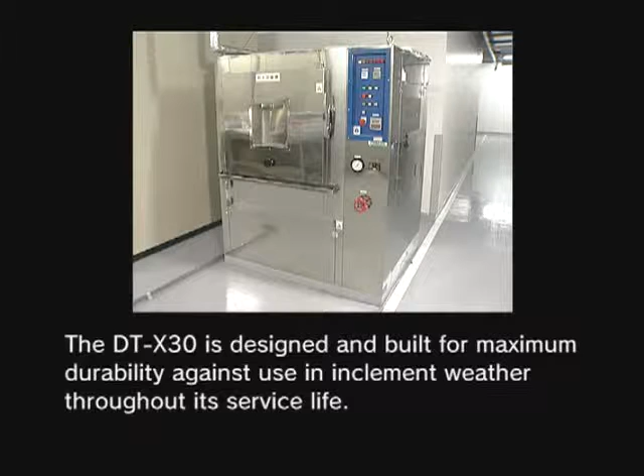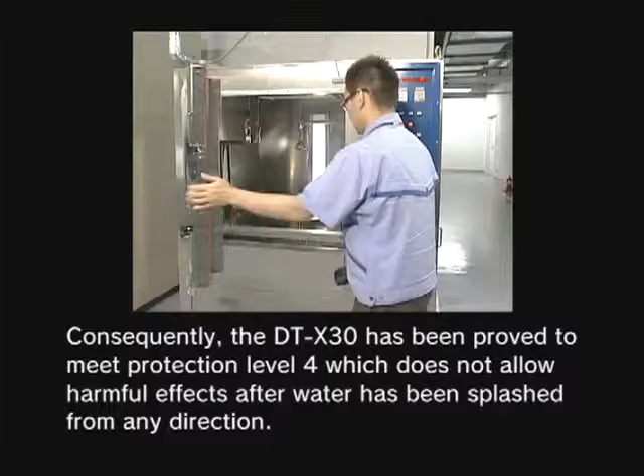The DT-X30 is designed and built for maximum durability against use in inclement weather throughout its service life. The entire assessment test is carried out following the definition and test procedure according to the international standard IEC 60529, prepared by the International Electrotechnical Commission for worldwide unification. Consequently, the DT-X30 has been proved to meet protection level 4, which does not allow harmful effects after water has been splashed from any direction.

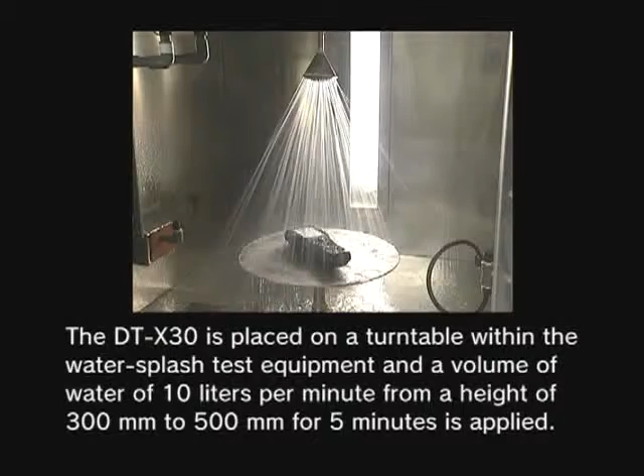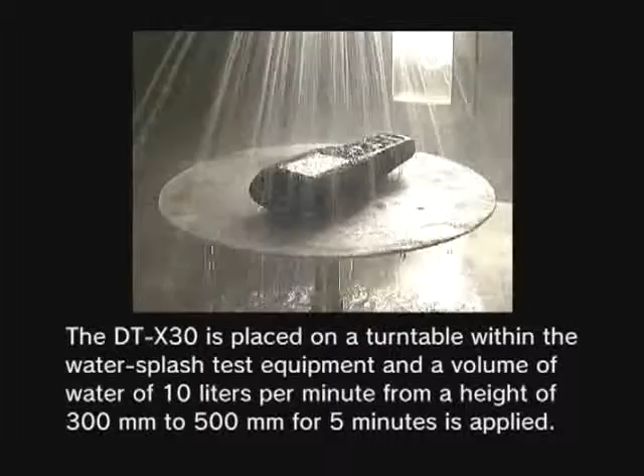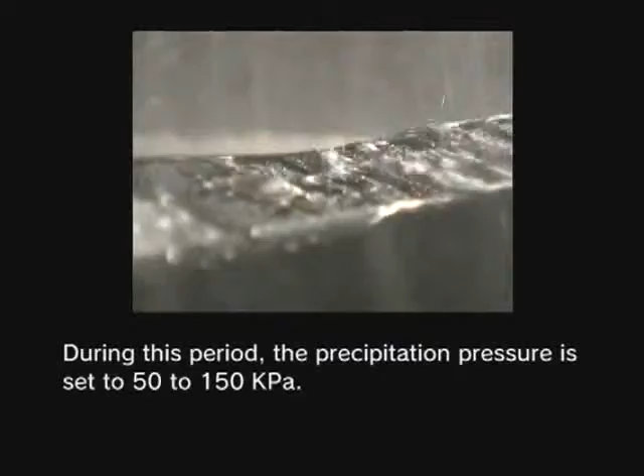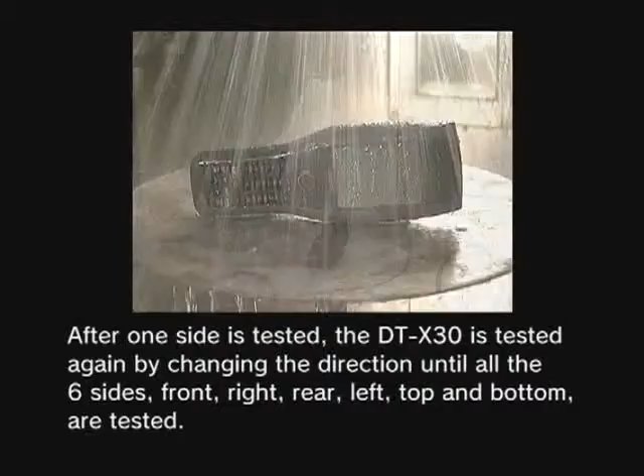The DT-X30 is placed on a turntable within the water splash test equipment, and a volume of water of 10 liters per minute, from a height of 300 to 500 millimeters, is applied for 5 minutes. During this period, the precipitation pressure is set to 50 to 150 kilopascals. After one side is tested, the DT-X30 is tested again by changing the direction until all 6 sides—front, right, rear, left, top, and bottom—are tested.

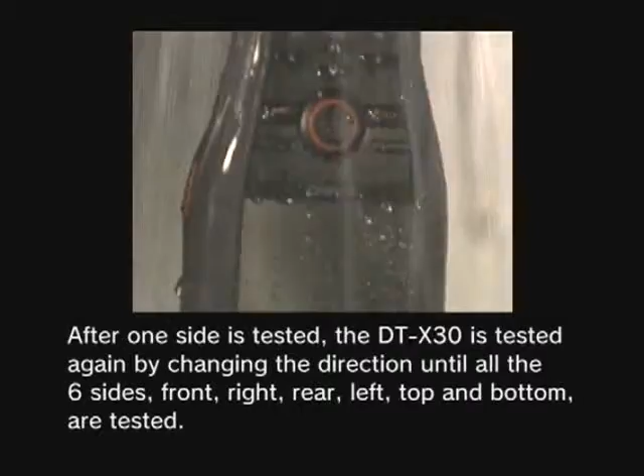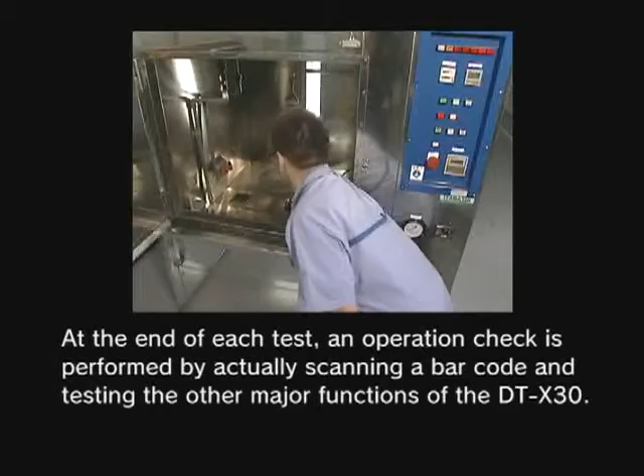At the end of each test, an operation check is performed by actually scanning a barcode and testing the other major functions of the DT-X30.

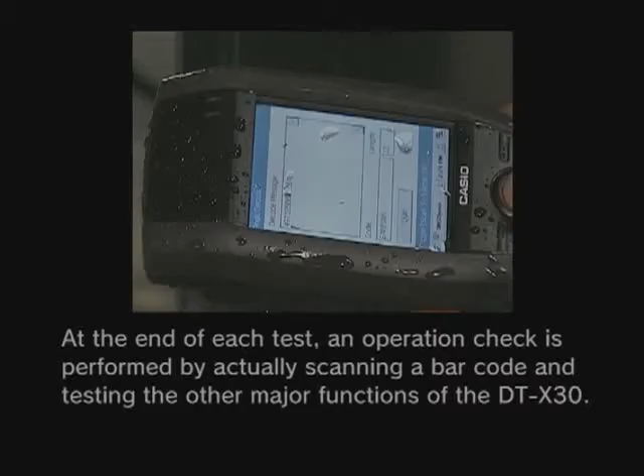The IEC 60529 standard also applies to the classification of degrees of protection against penetration of solid foreign objects, including dust. The classification ranges from 0, non-protected, to 6, dust-tight, the highest possible rating.

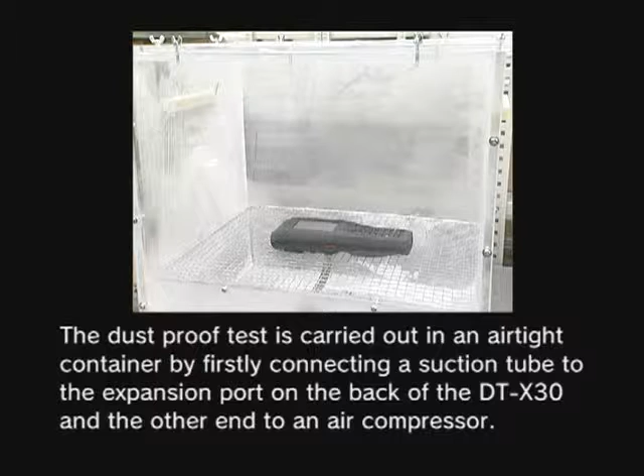The dust-proof test is carried out in an airtight container by first connecting a suction tube to the expansion port on the back of the DT-X30, with the other end connected to an air compressor. After the preparation is complete, the DT-X30 is left in the container and the container is tightly closed.

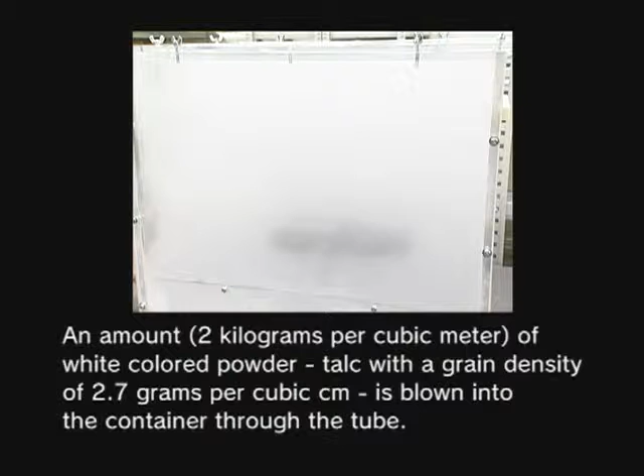An amount, 2 kilograms per cubic meter, of white-colored powder, talc with a grain density of 2.7 grams per cubic centimeter, is blown into the container through the tube. It takes nearly 1 hour for the powder blown into the container to settle on the bottom and over the DT-X30.

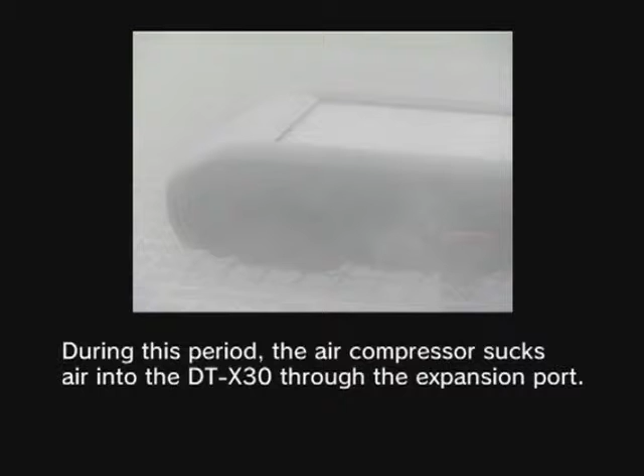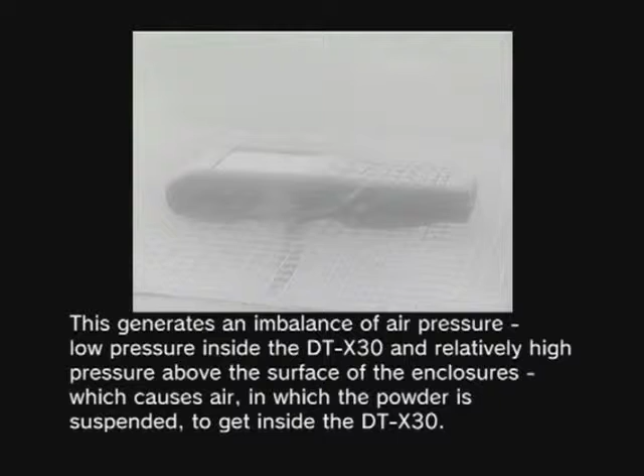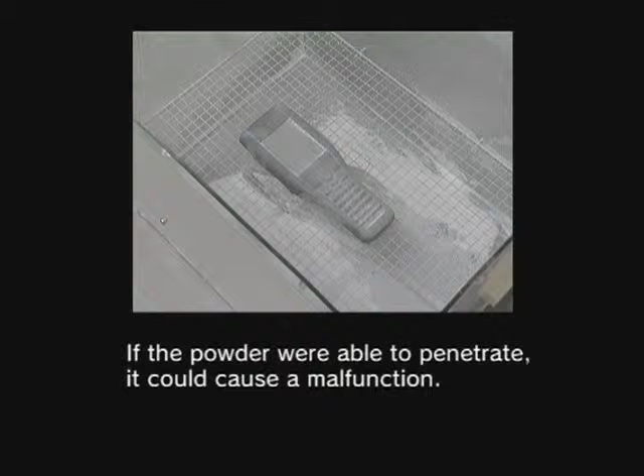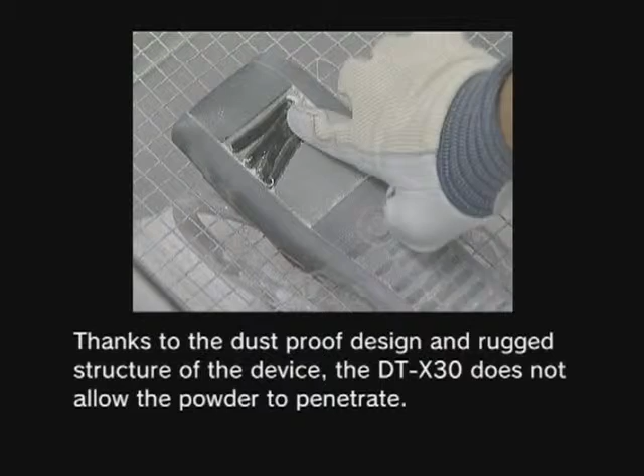During this period, the air compressor sucks air into the DT-X30 through the expansion port. This generates an imbalance of air pressure—low pressure inside the DT-X30 and relatively high pressure above the surface of the enclosure—which causes air, in which the powder is suspended, to get inside the DT-X30. If the powder were able to penetrate, it could cause a malfunction. Thanks to the dust-proof design and rugged structure of the device, the DT-X30 does not allow the powder to penetrate. This proves that the DT-X30 meets the highest level of protection for dust, which is 6.

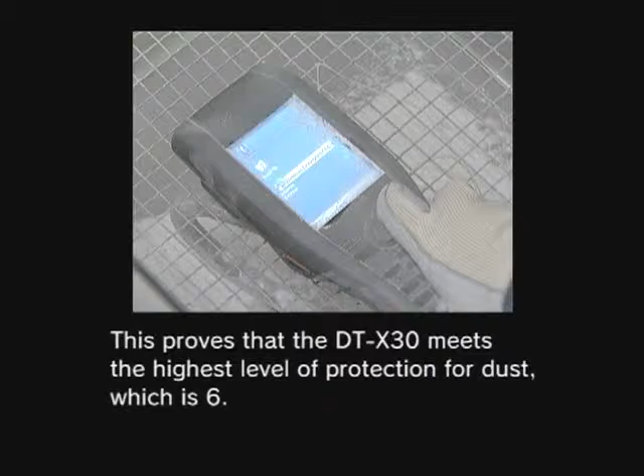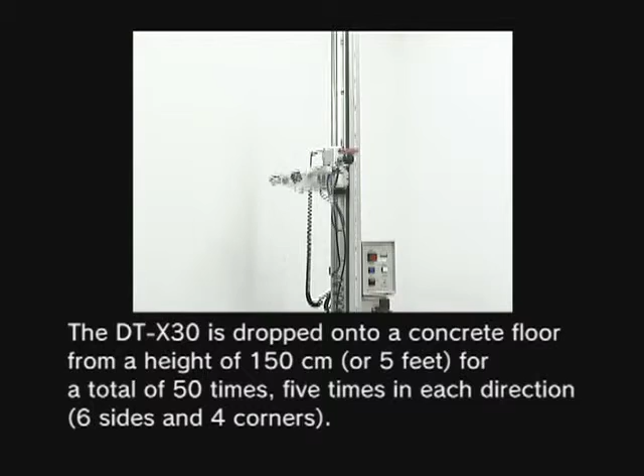To ensure the drop and impact durability of the DT-X30 against harsh handling in its service life, the DT-X30 is dropped onto a concrete floor from a height of 150 centimeters, or 5 feet, for a total of 50 times—5 times in each direction, covering 6 sides and 4 corners.

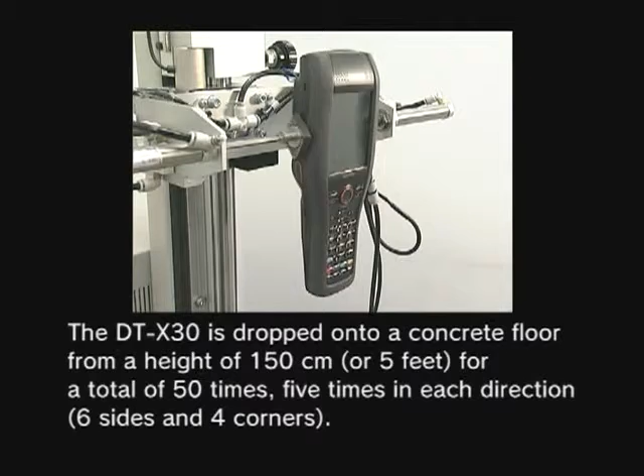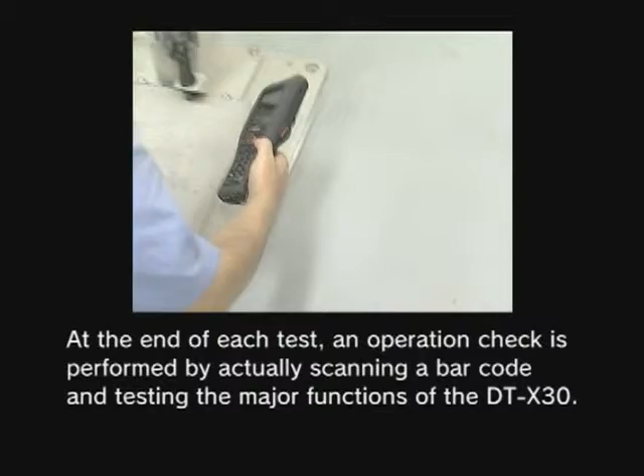At the end of each test, an operation check is performed by actually scanning a barcode and testing the major functions of the DT-X30. After 50 drops to concrete, the DT-X30 is considered to have passed the drop durability test.

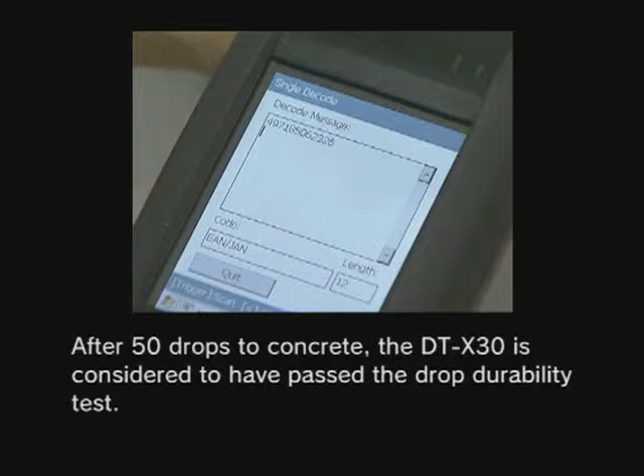Data capture, real-time communication, stylishly rugged. DT-X30 series.